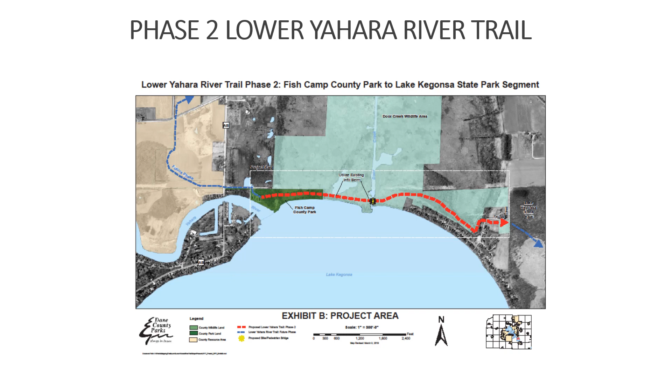Starting at the Fish Camp Trailhead, an approximate 16-car parking lot with a kiosk and bike racks is proposed to be constructed on the east side of the Fish Camp Net House. The parking lot will provide access to both the Lower Yahara River Trail and future accessible shoreline improvements at Fish Camp County Park. Dane County is actively working on providing on-road bike lanes on County Trunk AB and acquiring additional land to construct an off-road trail from Fish Camp Park to the village of McFarland.

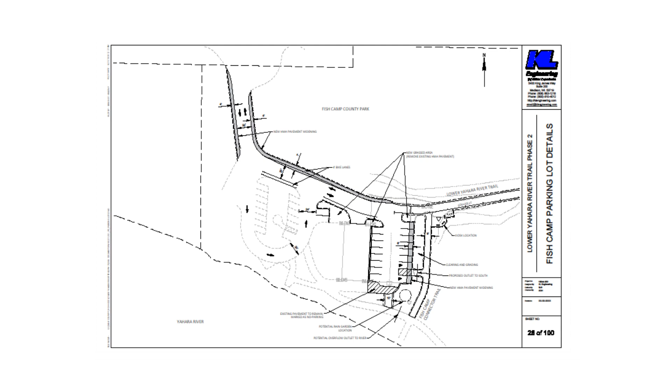This exhibit shows improvements to the Fish Camp Trailhead proposed as part of this project. In addition to the Fish Camp Trailhead improvements, this drawing shows future accessible shoreline improvements.

Continuing east, soil borings on the existing mown path between the Fish Camp County Park boat landing and Door Creek revealed the paved trail surface proposed on the original concept plan was not feasible due to settling concerns. This resulted in approximately 900 feet of additional proposed boardwalk, as shown on the following slide.

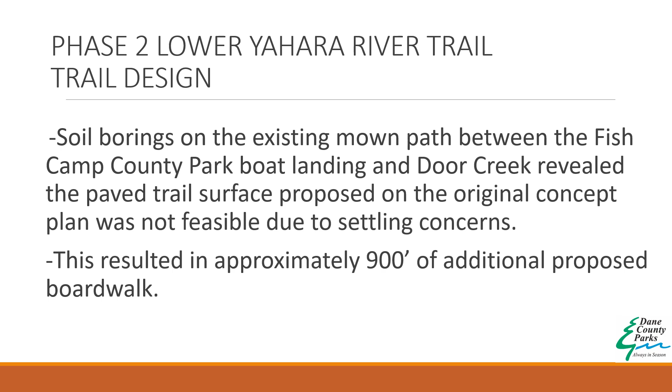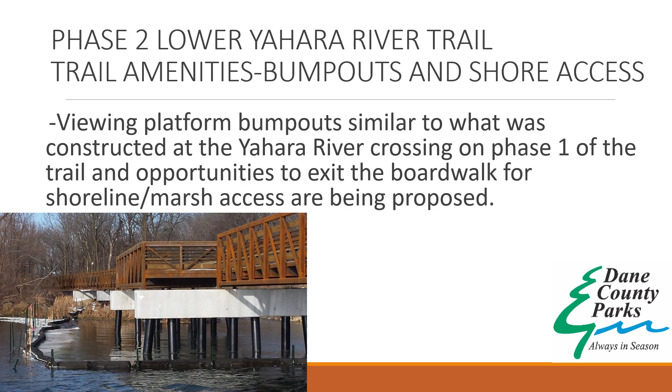An approximate 90-foot clear span bridge, similar to what was constructed at the Yahara River crossing on Phase 1 of the trail, is being proposed at Door Creek. The proposed bridge will allow passage of watercraft traveling the creek. The bridge location is shown on the following slide.

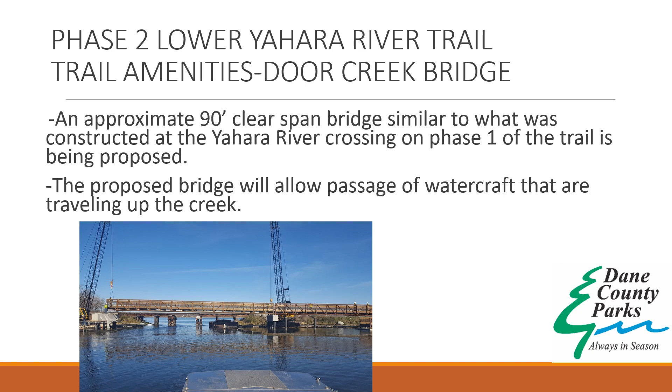These are the engineering plans for the bridge over Door Creek, which will look similar to the bridge that was constructed for Phase 1 over Yahara River.

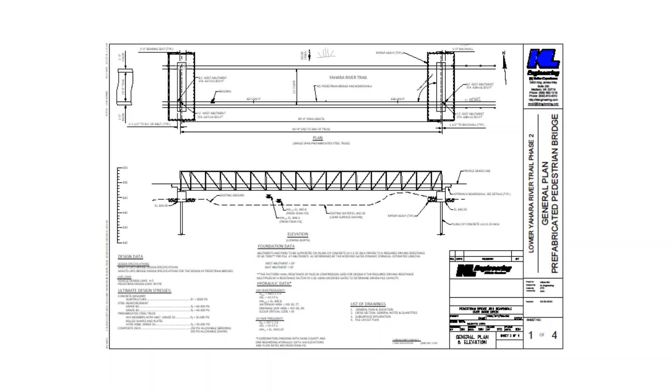Continuing east from the proposed bridge location, the trail will transition from an elevated boardwalk to an at-grade paved surface near the ATC transmission lines at the west end of the existing natural surface path. The proposed paved trail will follow the existing natural surface path east to the Swamp White Oak Grove, where it will transition to a boardwalk to bypass the oak trees on the north side.

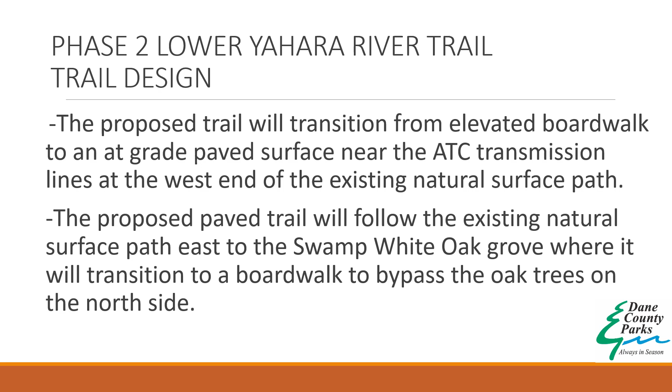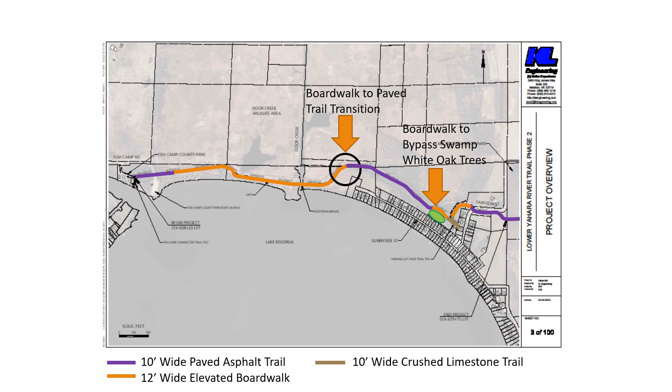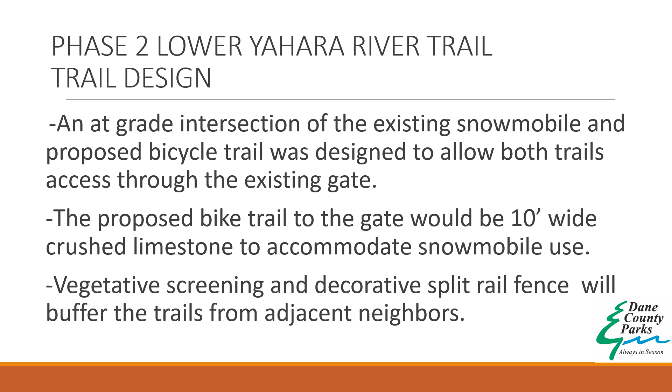An at-grade intersection of the existing snowmobile and proposed bicycle trail was designed to allow both trails access through the existing gate. The proposed bike trail to the gate would be 10-foot wide crushed limestone to accommodate snowmobile use. Vegetative screening and decorative split rail fence will buffer the trail from adjacent neighbors. The proposed design is shown on the following slide.

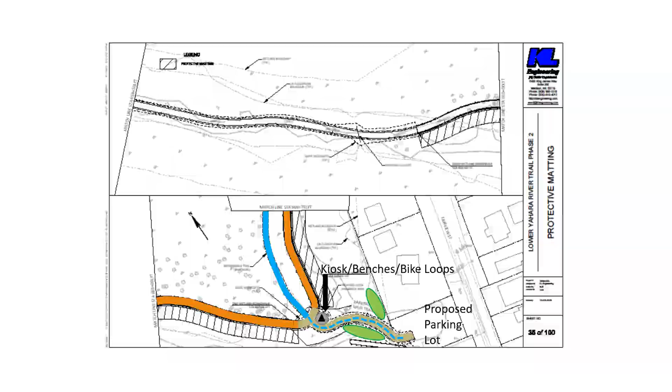An approximate 14-stall parking area is proposed on Fairview Street that will provide off-street vehicle parking for area residents to access the trail. Decorative split rail fencing, signage, and buffer plantings will provide county park identity to the site. The parking area will not be lighted or accommodate trailer parking. The site will also likely be used for staging and construction access during development of the trail. The proposed plans are included on the following slide.

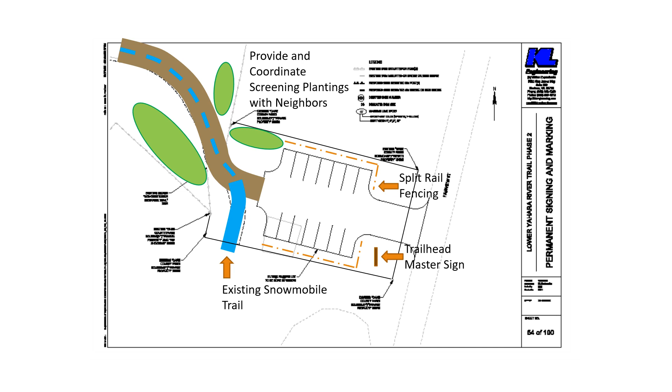The proposed snowmobile and bicycle trail were both moved west of the existing snowmobile trail to avoid an area that frequently ponds and to provide additional separation from adjacent neighbors. The proposed bike trail will cross Fairview Street and enter Lake Kegonsa State Park on the west side. Striping and signage will be added to the trail crossing on Fairview Street. Proposed improvements are included in the following slide.

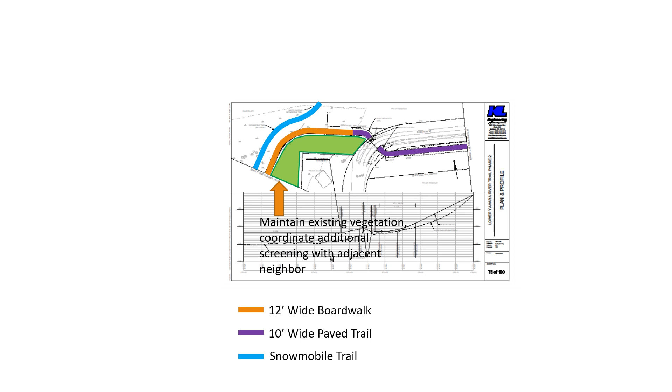The proposed bicycle trail will end in Lake Kegonsa State Park at a restroom playground parking lot. Archaeological sites in the state park were mapped and avoided by the proposed trail alignment. A concept alignment is shown on the following slide.

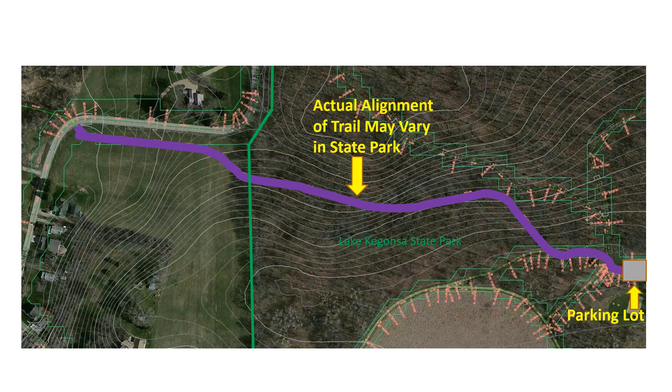The proposed bike trail will travel through the state park on a combination of on-road and off-road paths to Williams Drive, which is shown on the following slide. Dane County Parks is also actively working on acquiring additional lands needed to extend the trail from La Follette County Park to the city of Stoughton.

The project timeline and next steps include agency coordination and permit approvals from October of 2020 through February of 2021, finalizing the construction documents in October of 2020 through February of 2021, bidding the construction of the trail in the summer of 2021, beginning the construction in the fall of 2021, and trail completion in the summer of 2022.

For questions, to find out more information, or to provide feedback, please contact Chris James at Dane County Parks at 608-235-2252 or james@countyofdane.com. Please submit your questions and/or comments by October 31st of 2020.